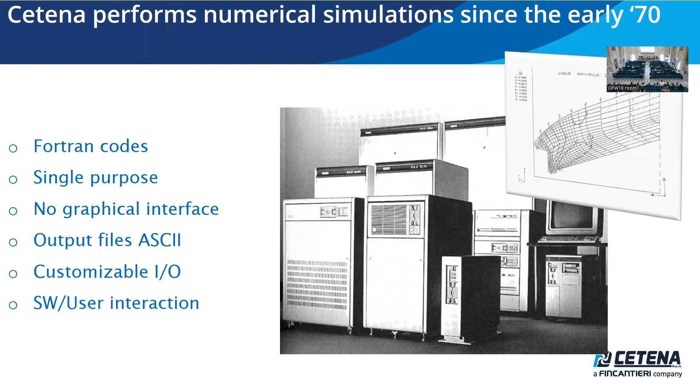They were huge output files with lots of numbers and data. And of course, the post-processing was not even comparable to today's standards, as well as the hardware at that time. The computers used were mainframes with a single core, multi-user, and as large as a freezer or a telephone cabin. Nowadays, we have updated our software and our hardware.

Today, we're using basically commercial software, namely ANSYS CFX, ANSYS Fluent, Star-CCM+, and Helyx Engys. But still, we develop and maintain some in-house codes. The commercial codes we use are, as you know, general viscous flow solvers, RANSE solvers, and our in-house codes are codes based on potential flow theory.

And in between, you see OpenFOAM, that is a viscous flow solver. That means that it belongs to the list on the left. But I place it in between because we make some customization of this software. We wrote some routines in cooperation with the local department of Naval Architecture, and we use this software standalone or also coupled with some of our codes that you see listed on the right.

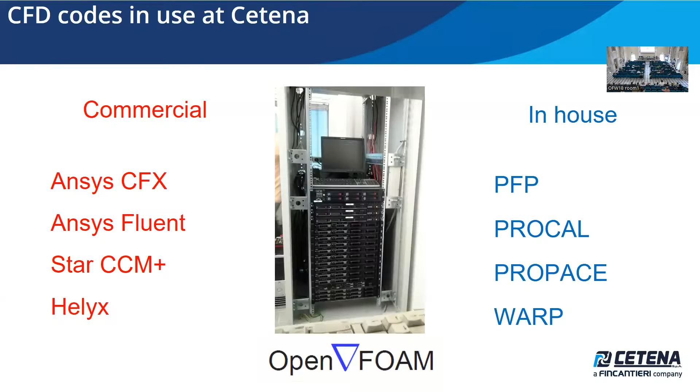And of course, we changed also the hardware. This is our old cluster. The new one has filled up the rack, and we go much faster. Well, in ship design, CFD is very useful because numerical processes gain more and more importance in industrial application, above all in the naval industry, because there is a big difference between the naval industry and other industries, such as, for example, automotive.

In the naval industry, in the design phase, there is not the prototype phase. In automotive, you design a car, then you build a prototype, and you make a test on the prototype. In the naval field, it's not possible. In the naval field, you design the ship and you build the ship. Your prototype is the final result. So lots of tests, both experimental and numerical simulation, must be done to ensure that the process goes fine at the end without any problems. This simulation enables a thorough process.

Understand that it's possible to separate different parameters and see their influence on the final result. When you make a numerical simulation, you can test several parameters and their influence on the final results of every component of your project. You can also have a look inside the work piece and see an analysis of the process. Performing a numerical simulation is like making a small film that you can play again and again, viewing it from different points of view to see every aspect of the physical phenomenon you are studying.

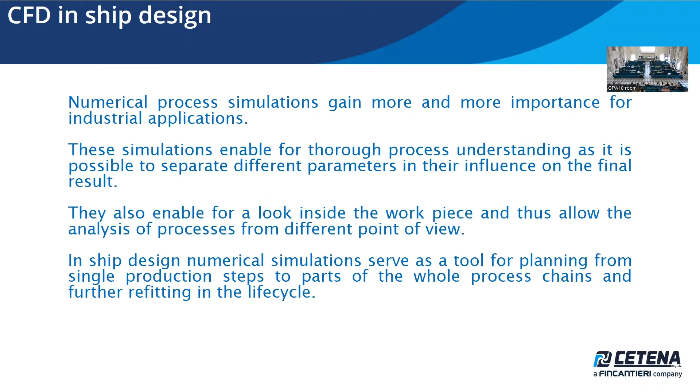Numerical simulation is also important because sometimes during the lifetime of the ship, you have to make refitting or solve some problems, and in this case numerical simulation is essential because no experimental activity is possible in this phase of the ship's life cycle.

CFD simulation and CFD software are very versatile tools, used in lots of fields of manufacturing industry. If you go on the web page of a software producer, you see many examples that span a large part of manufacturing industry.

These characteristics match very well with the problems we have in ship design, because a ship is a very big thing, something like a small floating town. There are lots of problems to be solved, and most of them can be solved with the aid of CFD simulation.

But we also use CFD for evaluating the thermal shock of a missile launch on a warship, where the flow is at high Mach number. We reach Mach numbers of 1 or 2.

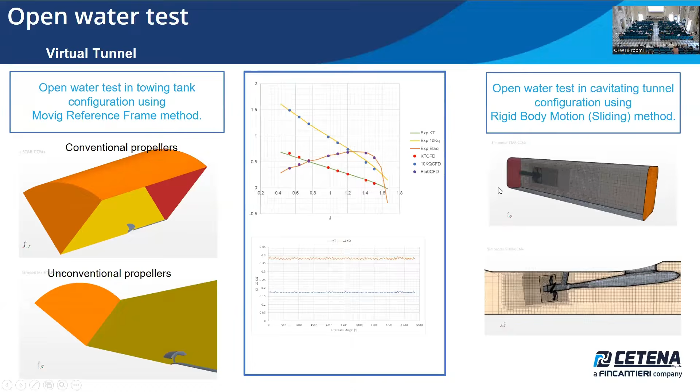As I pointed out before, the models we use are sometimes not developed enough, not accurate enough. In fact, one problem we face and are still facing is cavitation. Cavitation is very important in ship design and is very hard to handle with numerical codes.

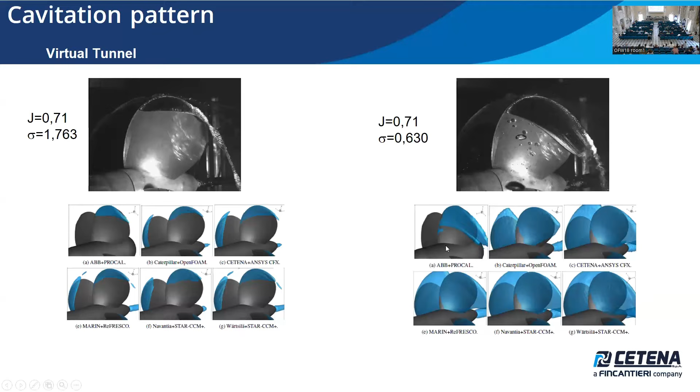On the right, you see another condition where almost nobody except Procal, this simulation predicted the cavitation in quite satisfactory way. In fact, there was an overestimation. That means the models we are using now are not very efficient to reproduce all the cavitation phenomena that are possible. Strange enough, in this case the best software is based on potential flow, a panel method, not on viscous flow.

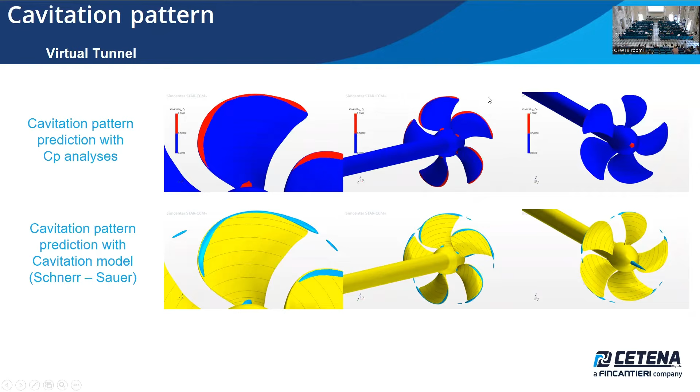Anyway, cavitation is still important and must be studied because it's a problem. Now we approach this problem with the analysis of the pressure. For propeller designers, sometimes it's enough to have an idea of cavitation inception. In this case, the analysis of the pressure on the blades gives an idea of the inception of the cavitation, and you know if some cavitation develops over the propeller.

This is a case study of a ducted propeller. In this case, the problem was that we have found some cavitation. We supposed that the cavitation was due to the detachment of vortex from the strut of the duct, and in fact we see that as the vorticity moves from the duct to the propeller, there is a zone of low CP where that cavitation can be incepted.

This is a study of cavitation inception. It is the solution of a cavitation problem without a cavitation model of the software, simply using the pressure as a marker for cavitation inception.

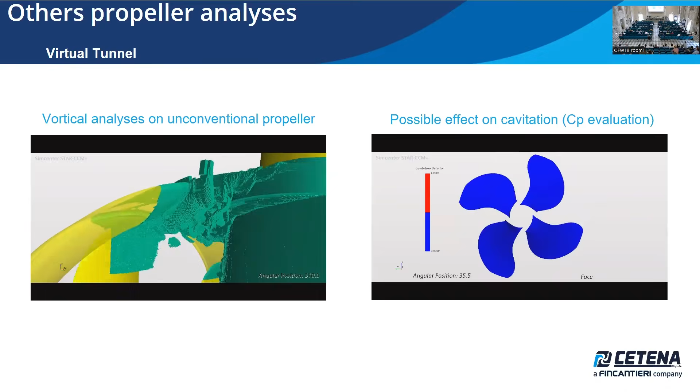Okay, another approach, another simulation that is interesting for the naval architect is seakeeping, the study of ship motion in waves. In this case, RANSE can be applied to evaluate the response of the ship in waves. Generally these tests are carried out in a small basin in regular or irregular waves, and the output is a response operator that tells the designer how the ship responds to a different sea state.

Generally, dedicated codes are used to evaluate the response operator, and generally these codes are based on potential flow theory. A viscous approach to this problem is very complex because there are several problems to solve. First of all, there is the absence of symmetry because waves can arise from every direction. Of course, the simulation you have to do is unsteady because the phenomenon is clearly unsteady.

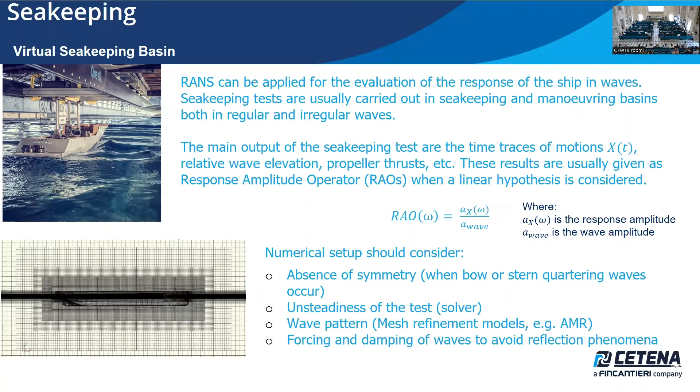There is the problem to model the wave pattern because generally waves tend to dissipate in a computational domain. So you have to do a mesh particularly refined in the region of the free surface to avoid numerically dissipating the wave. And then we have to take into account the fact that on the boundaries, waves can reflect, and it's not appreciated. So you have to force some damping of the waves on the boundary to avoid reflection.

This is a quite complicated setup, and of course one can wonder if it is worth it or not. Of course, if we are interested only in the wave motion, in the motion of the ship, the results of the two methods are more or less comparable.

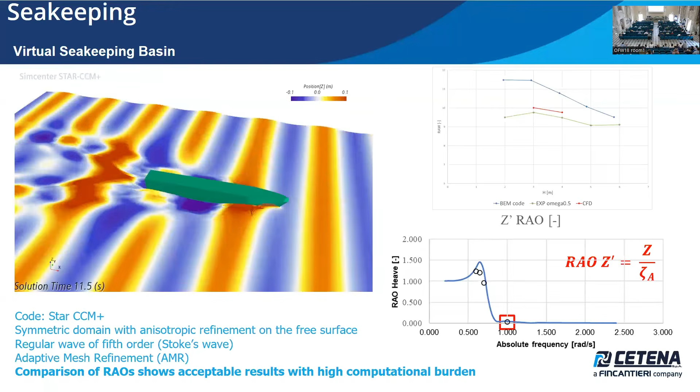Results are more interesting if we are looking for the added resistance, if you want to know the increase of resistance of the ship due to moving in the wave field. In this case, a RANSE approach is more accurate than a potential flow approach. But the real reason these studies and this methodology are important is that sometimes there are problems that are related to seakeeping, but these are not seakeeping problems.

This is the case: it is the evaluation of incoming water in the anchor box. This phenomenon is ruled by the seakeeping, by the moving of the ship on the waves, but we are not interested in how the ship moves or how it responds to the wave solicitation. Instead, we are interested in how much water enters the room and how to mitigate this phenomenon. So this is clearly a CFD simulation, but it's strongly influenced by the correct prediction of the ship's interaction with the waves.

In this case, of course, results are good, even if the computational burden is very high, and it needs some days of computational effort on our cluster to reach convergence.

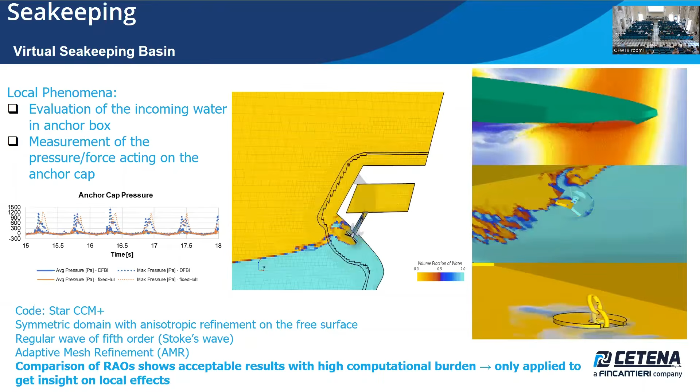Another problem we are trying now to solve with CFD is maneuvering. Generally, ship maneuvering is modeled with dedicated codes, as I showed you before on the first slides. We also have a naval simulator to simulate ship moving, but these simulators use, of course, simplified equations to run in real time, and some of these equations are tuned by several parameters.

Now we have found that some of these parameters can be tuned more finely with the aid of a CFD simulation. So we perform some RANSE calculations to reproduce some tests and to find some of the parameters that are generally switched and given to the simulator. For example, to take into account the effect of the hull over the rudder during the turning maneuver, or to evaluate the forces over the hulls during the motion.

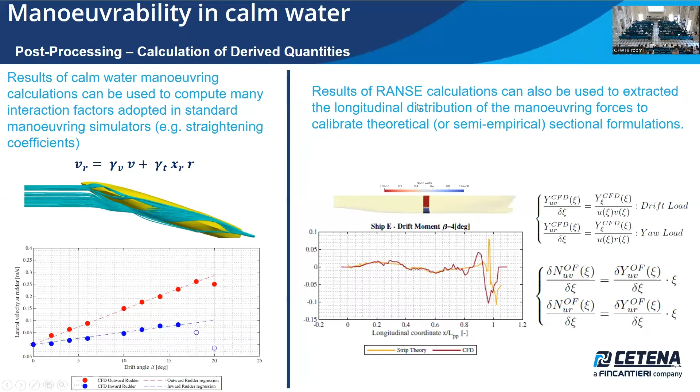And in this case, RANSE is both a validation tool as well as a support tool to derive some parameters needed for this software. Of course, the idea is to use one day a direct CFD approach of this phenomenon. That means the idea is to place the hull in the water, and then start the simulation at the beginning with the captive motion, then with free motion, and to reproduce the turning circle, the maneuvers that are requested.

In this case, we have an answer of what happens around the hull. Not only do we have information about the maneuvering, but we have also some important information about the fluid dynamics below the ship that may be important and may sometimes generate problems. For example, vortex detachment and interaction of vortices detached from the fore to the aft body, and so on.

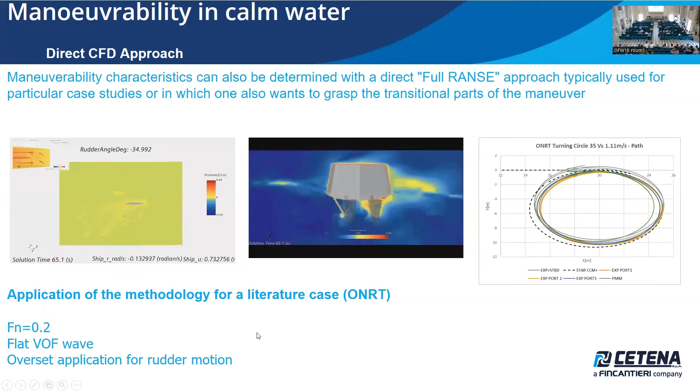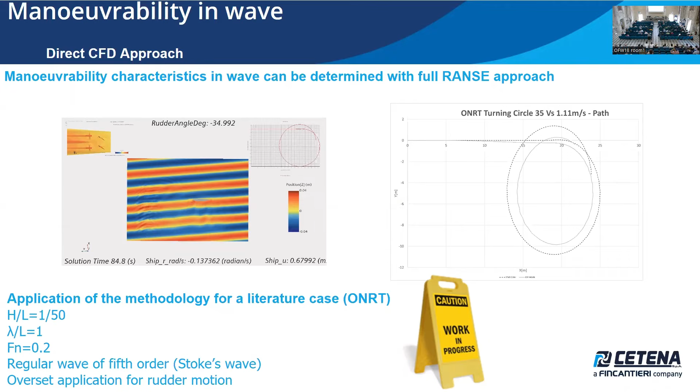And of course, this approach has been tested and used in calm water, but the idea is also to use the same approach in regular waves. And of course, this is an advanced topic. We are working on this problem. We have not reached any industrial results up to now, but at present we are trying to model the turning circle of a ship in free running with the propeller and the rudders. And the idea is, as I told before, to use the CFD approach not for studying the maneuverability of a ship, but to study the effects of the maneuver over the ship structure if there are some problems.

Another typical activity in the naval field is optimization. Optimization generally is done with a cycle. It starts from the definition of the problem, the definition of the design space, the parameterization, in this case of the ship or of the propeller, and generally the CFD solver is the tool used for the performance evaluation. At the very beginning of this activity, the main tool was a BEM solver because it's of course extremely faster. But we have found that thanks to the speed up of modern computers, viscous flow codes can also be very useful, at least to solve some particular problems.

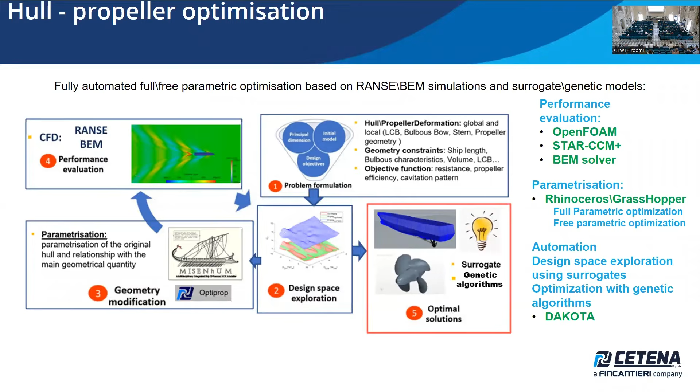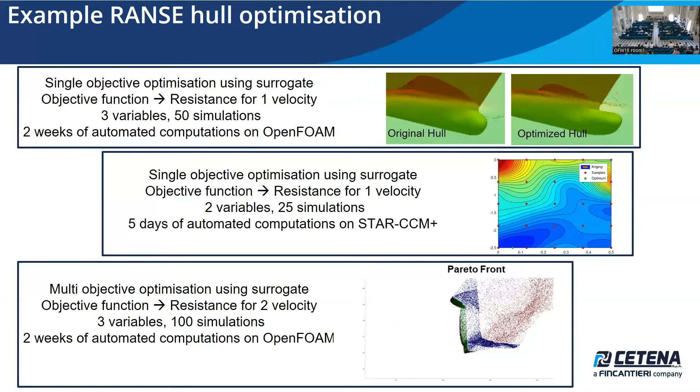Of course, time is a problem in this case, because if you want to perform some optimization with a viscous flow solver, we need several days, even weeks of simulation. But we have found that sometimes it is worth waiting this time. If we have to study a local deformation, for example a local bow deformation, an optimization cycle using a BEM method to evaluate the results takes 12 hours against the 5 days of a RANSE optimization. And in this case, the effort is not worth it, because the solution is more or less the same. The result in this case is the total resistance coefficient of the ship, and the results are very similar.

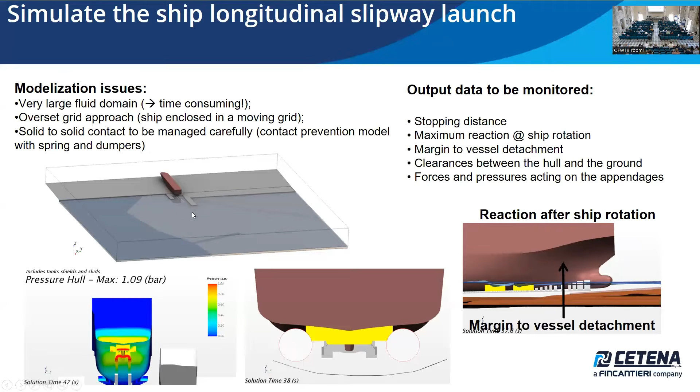Most of all, the stopping distance, because there is a quay here that must be prevented from crashing, and also the clearance between the hull and the seabed is important to check, because we don't want any crash between the appendages and the hull and the seabed.

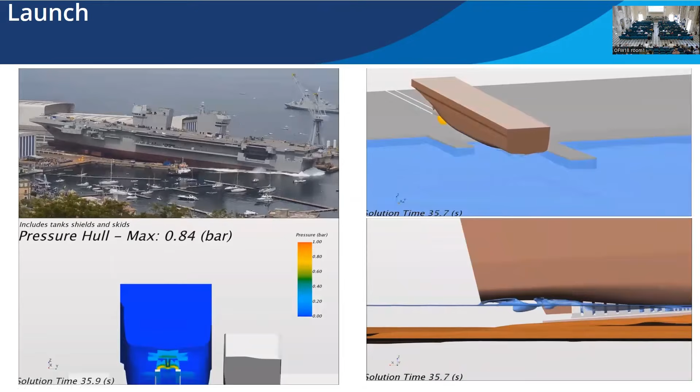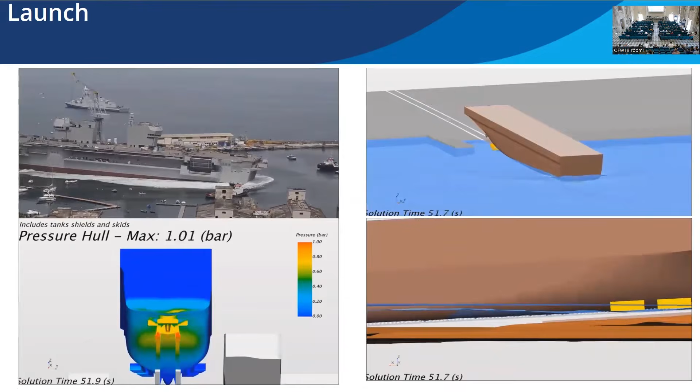And this simulation has been carried out with the CFD codes, and we found that it works very well. That helps us to model very well all the features we are interested in, and the results are extremely interesting, even if the time requirement to perform such a simulation is extremely long, and the simulations are extremely complex.

Another problem, more or less of the same type, is during the design of the topside of the ship to evaluate the interaction of the hull, for example, with a landing aircraft or with the aircraft during the takeoff. In this case, a simulation is important, is extremely complex, but it gives you lots of results. And as I told you before, this is a film of the phenomenon that you can see again and again, and you can spot several details that are interesting.

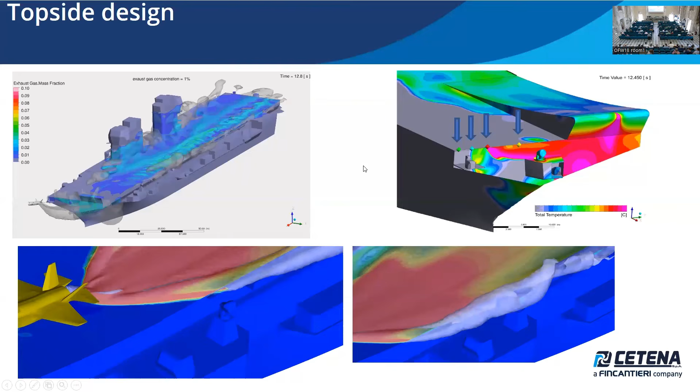For example, if you want to see the effects of the takeoff over a radar, you can make some detailed analysis, and you have lots of information. But also in the second phase of the design, if you want to move, for example, or to place some electronic device, you have an idea, for example, of the temperature, and you find the place to put the equipment in a safe position.

These simulations are also important because, for example, there are several air intakes, and another problem is to study the flow inside these intakes. This is a very simple problem indeed, because we know the mass flow, as we know the specification of the plants, but we don't know the temperature of the incoming air, because when the plane is landing or is taking off, there is a strong interaction of the hot flows.

So in this case, we perform a dedicated post-processing of this simulation, placing a monitoring surface over the intakes. We derived from the simulation the time history of the temperature, and we supply this time history as a boundary condition at the inlet. So we found the variation of the temperature at the intakes, and we can make our study with more accuracy to evaluate the efficiency of the cooling plant.

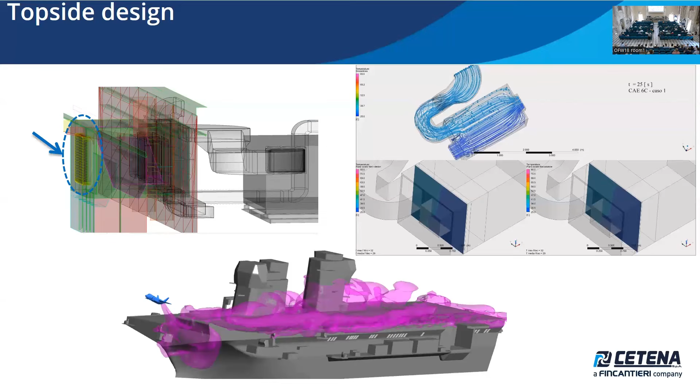And by the way, there is an important consideration that I'd like to point out. I've talked about computing power and speed-up of the computers, but we also need storage now, because one of the problems we are finding now is to store the data. These simulations that you've seen are full-scale and unsteady simulations that need lots of data to be stored. And if computers are becoming faster and faster, storage is not increasing as fast as computer power.

Anyway, just a few words to say that even if numerical methods are more and more complex and more efficient and can model more and more complex problems, sometimes it's helpful to simplify the problem. This is an old case when several years ago we had to evaluate the loads on pods due to the propeller effects. At that time, we didn't have enough computer power to model the rotating propeller, so we studied the torque and the thrust of the rotating propeller with the BEM code, and we applied this force to a CFD code to reach an evaluation of the load.

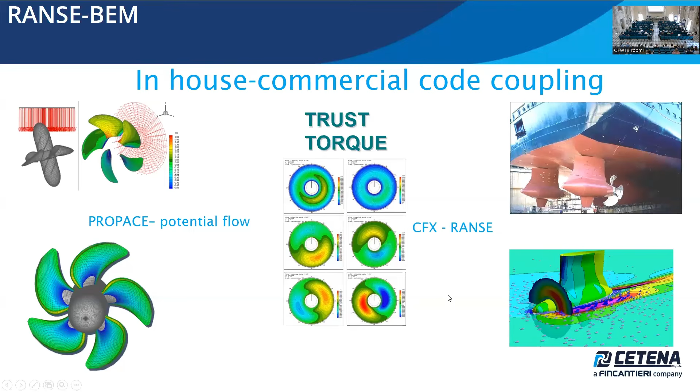Nowadays, we use this approach again. In this case, we have to see the effects of the propeller over the strut. Of course, as you have seen before in simulation, you can model the propeller, but in this case, you need lots of time to reach convergence because we have an unsteady simulation. And of course, if you change the propeller, you have to change the mesh and run it again.

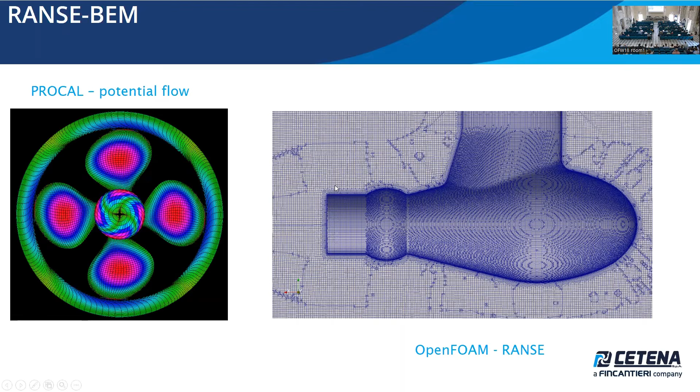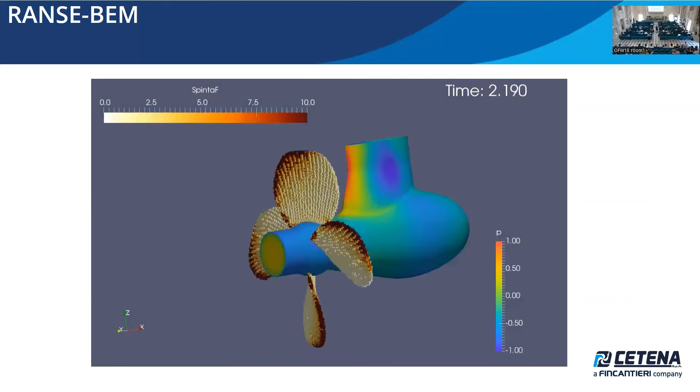In this case, we have evaluated the thrust of the propeller with the potential code. We have built up a grid for a steady state case, for a case without propeller, and then we mapped the results of the BEM simulation over the grid. So we have an unsteady simulation of a rotating propeller without any rotating grid, and in this case, results are much faster, and it takes 1 hour instead of 1 day to perform.

Finally, we can invert the problem. Sometimes we have to study the behavior of the propeller behind the hull. Also, this case needs lots of time because the propeller is quite complicated, so we need some very, very small cells, and the hull is very large, so you need lots of cells ahead to model the hull and to produce the wake where the propeller will operate.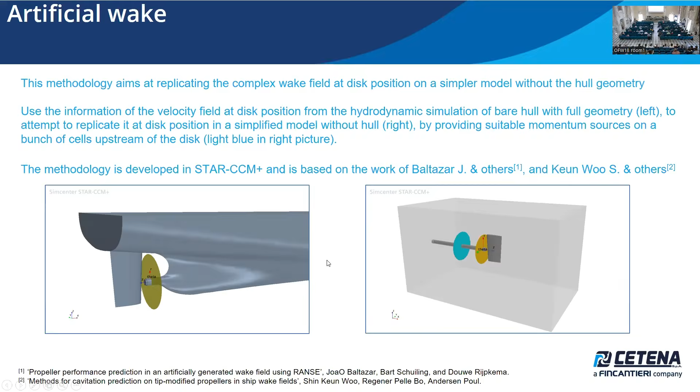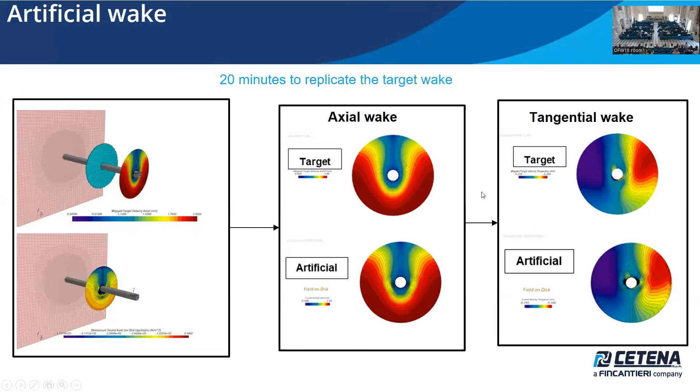In this case, we are trying to model the wake with body forces, removing the hull and replacing the hull with a disk or with body forces that reproduce the effects of the hull. In this case, an analysis of the rotating propeller in 5 days is reduced to an analysis of the propeller in 8 hours.

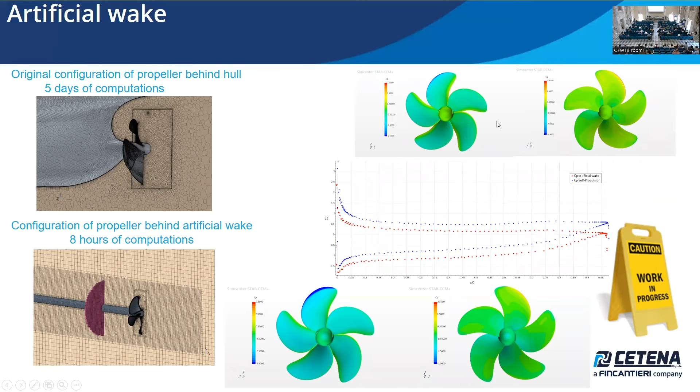The results are quite interesting. There is not a perfect agreement. This work is still in progress, and we have some discrepancy between the two approaches, but qualitatively the results are very promising. So we suppose that we are on the good way to find a solution.

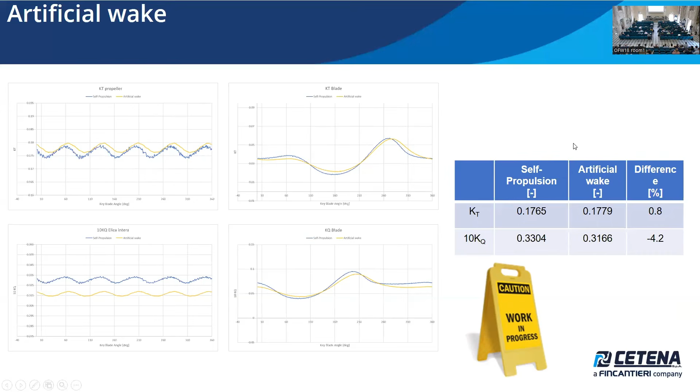Well, to summarize, finally, what can I say? RANSE methods are widely used in ship design, not only as a protagonist, that means that you don't use RANSE only to solve a problem, but also as a supporting actor. That means that you also use RANSE to provide data for other kinds of simulations. And powerful computers will allow RANSE methods to complement BEM methods. BEM methods will live still long, I suppose, but now RANSE is becoming a good complement.

RANSE methods are very powerful. You can model the most complex problems, but time is precious. So if possible, let's keep it simple when we can.

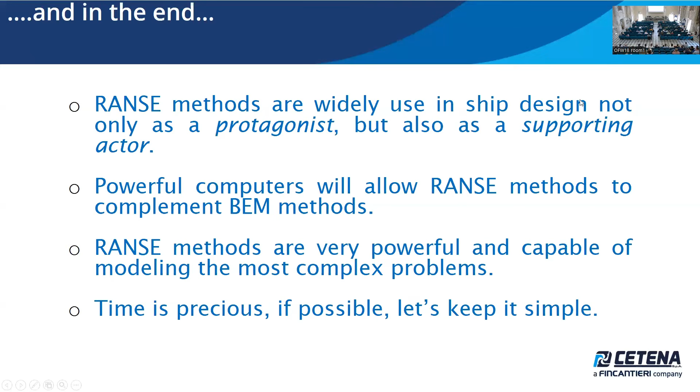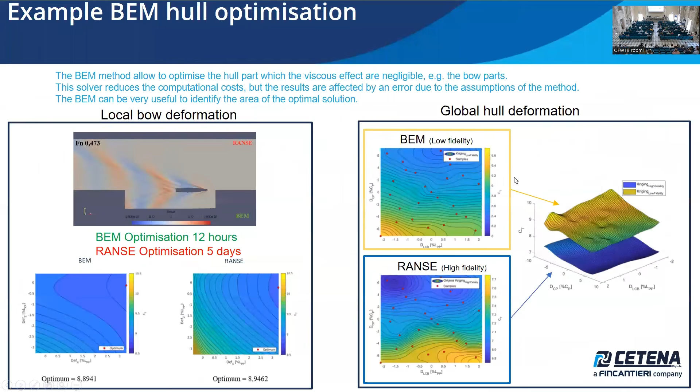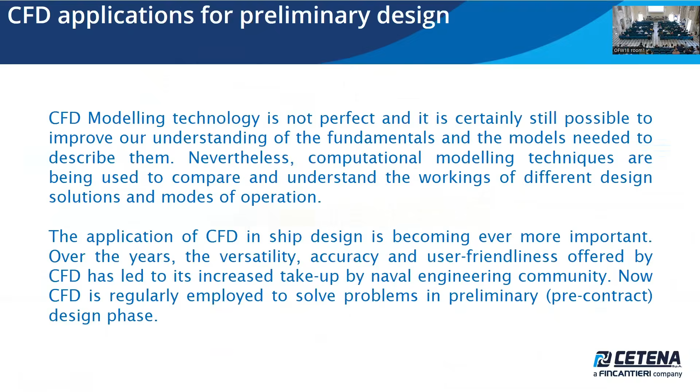I have one quick question. How many of those applications are done with OpenFOAM? Can you use your microphone? The applications are, can I turn back? Generally, all these applications, optimization, use OpenFOAM and that code. And all these applications, what we call virtual towing tank or virtual tunnel, these are developed with OpenFOAM. Most of these are developed with OpenFOAM.

Generally, we have a philosophy. We use OpenFOAM for repetitive simulation, so standard simulations, vertical applications that are set up very straightforwardly and that have to be repeated several times. This is because we are preserved from license engagement. Of course, for standalone applications, for solving problems in life cycle maintenance or problems that arise, generally we use STAR-CCM+ or ANSYS CFX, Fluent for supersonic flows, okay? Because as I told, the range is extremely wide.

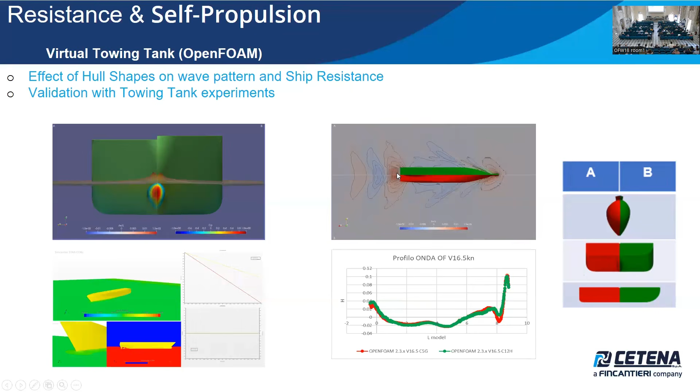Yes, generally ship resistance, calculation of resistance in calm water to evaluate the ship resistance, and of course to evaluate the power to install on board. This is the first, and the other is appendage resistance as well as appendage alignment.

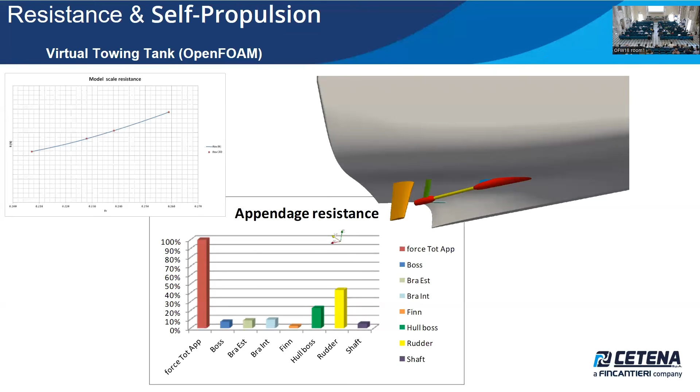There is another kind of simulation not reported in this presentation, generally for warships: the diffusion of smoke over the structure. The optimization is in the later part, but in the first part, an evaluation of the smoke impact over the structure is extremely important in the pre-contract phase. Thank you very much. We also get asked for maneuvering, crabbing, turning circle, that sort of thing.

So the second question is about a big discussion in naval hydrodynamics today. I have noticed that quite a lot of your simulations are at model scale. And we push towards full scale as much as possible because of fouling, etc. What is your feeling of usefulness and difficulty between the two?

We must go toward full scale. It's unavoidable. We are moving toward the full scale for lots of simulations. For example, the simulations we have seen of the ship launch, of takeoff, smoke and air conditioning, most of these are carried out in full scale, except the classical hydrodynamics. Strangely enough, classical hydrodynamics is still related to the model scale. Unfortunately, this is a problem, and we have to move toward the full scale.

But to do this, we need, of course, more powerful computers, and also, I say it again, we need storage, because we talk about computer power, CPU speed, but we must consider that the full-scale approach needs large amounts of data to be stored. And as I showed you very fast in the last slides, sometimes these results are taken out 1 year later to perform other simulations. So I believe that in the future there will be particular care for storage.